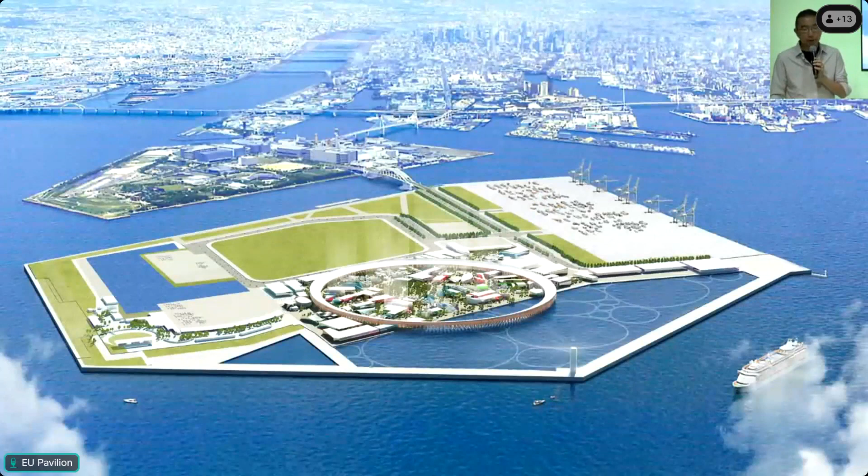But at the very beginning, I was thinking about what is the meaning of the Expo at this beginning of the 21st century. And of course, as you know, the Expo itself started in 1851 in London. It was like the promotion of this revolution of industry, and many new things came out. Then, of course, the beginning of the 20th century is more like modernization, modernism, and Bauhaus, and then a lot of new things came out. And 1970, that was one of the peaks of the Expo, I believe, that we had an Expo in Osaka, and it was a huge success.

But now, this is the 21st century, and a lot of new technology is invisible in a sense, and a lot of those kinds of things have been developed and made up promotions independently, company by company. So I was wondering, what is the reason? What is the important fundamental meaning of the Expo? And then that was the time, as you know, the beginning of 2020, April, that was the time of the pandemic.

We are in the middle of some uncertainties. And at the same time, around that period, everybody was talking about division in the world. Of course, we were talking about diversity, respecting the diversity, but if diversity ends up as division and conflicts, that was so pitiful, I thought. That was the global situation at that time, and now it's still like that.

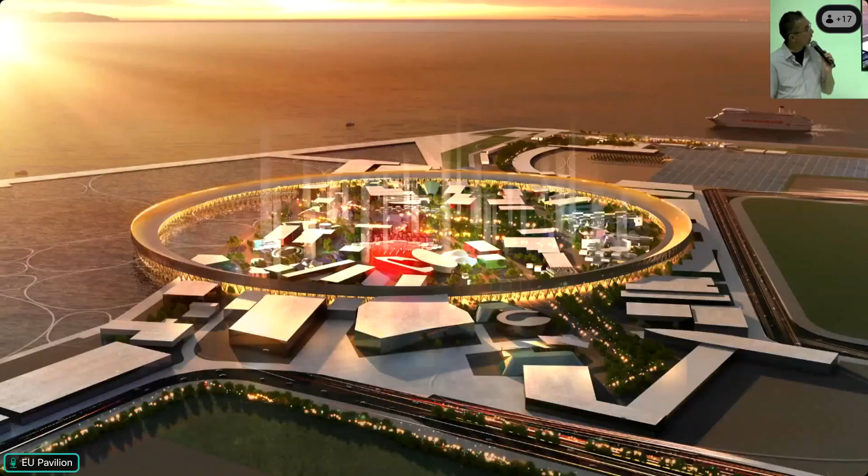Together to have real communication. Over COVID, we have more and more precious real communication—to see persons in reality and to see the situation, share the space in reality. So that kind of precious opportunity to show, to make a message that diversity could have unity together. That was the thing I thought at the very beginning of the process.

So it is not about the design, not about the shapes, but it's a very basic concept. Sorry, it is in Japanese, but it says diversity and unity.

And then diversity, but at the same time, it has something unified. And the world is sharing one important thing. So that was the very, very starting point.

And then I thought—of course we discussed the functional things, how to make a main circulation path, and how to protect people from the sunshine and the rain, creating the roof for those functions—but how can we create such a strong message to the world that this is the place? The expo must be, from now, the place where diversity and unity are strongly integrated.

And then I thought the simplest shape, this circle, should be there. Of course, before that, functionally, the circulation paths must make a nice flow of people, avoiding too crowded a situation. Even today, so many people, so it's crowded, but still we have the flow of the people.

So that functional thinking was there, but beyond that, this circle shape should be a very strong message that now so many countries, so many people are here in this place, connected to each other, making communications. So this pure shape could be the symbol of unity, and of course also the symbol of the circulation of sustainability.

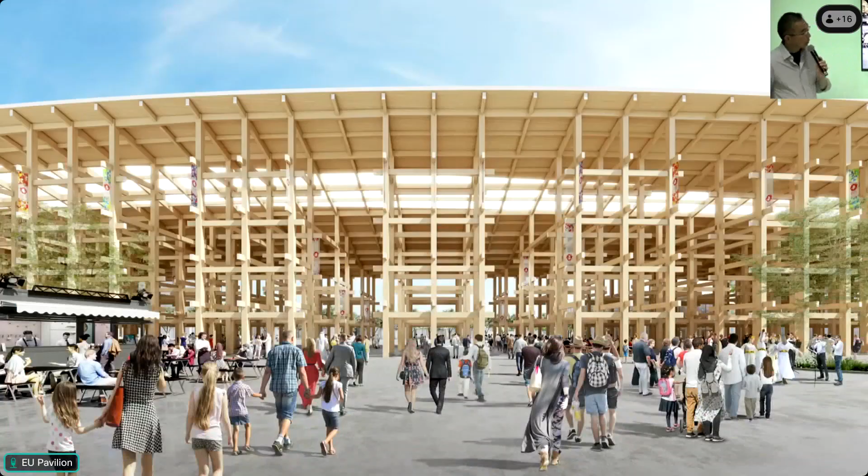Then I proposed to make this Grand Ring in a wooden construction. This is a rather easy decision. The decision itself was of course easy, but the realization was very tough.

In the last more than 10 years, large-scale wooden construction has really been developed and pushed, not only in Europe but throughout the whole world. I have had an office in Paris for around 10 years, and I really felt that there. I myself was also involved in a skyscraper made of wood—those kinds of projects are popping out a lot.

And in Japan, on the other hand, we have such a long history, traditions of beautiful wooden architecture, more than 1,000 years of history. So it is really wonderful to combine such wonderful traditions together with the latest technology to create our future architectural proposal. That was the reason why I proposed wooden construction.

And especially these joints—it's based on Japanese traditional wooden construction. But for example, in Kyoto, you will see Kiyomizu Temple and the famous stage, and the whole structure under that is made by something like this: columns, and then the beam sticking in, and then putting the plugs to fix it. Traditionally, they used wooden plugs.

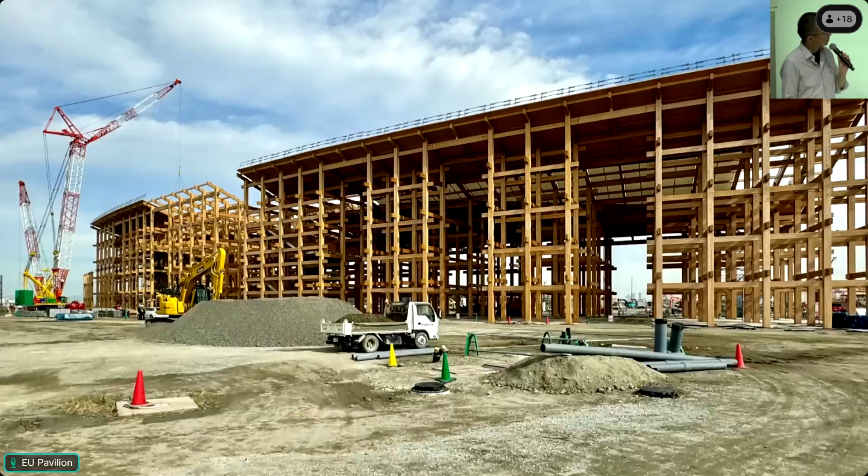We had three wonderful Japanese leading contractors, and they started to make a mock-up, then destroyed them to do experimental testing to see what kind of conditions they'd face. After many rounds of testing, they developed a new way, but based on traditional architecture. It took many years of construction, and a lot of criticism about the money, the uses, and all kinds of things. But finally, it's done.

One more thing is, this roof is not only a roof, but we planned it as a roof garden or roof pathway, because on this island - Yumeshima Island, a man-made island - if you're standing on the ground, you don't see the sea. Even though there's nothing built, you still don't see the sea, because there's a wall all around the island to block the big waves and to contain the filled land.

That was a fact that really shocked me. I came here at the very early stage of the project - there was nothing, flat land, but we didn't see the sea. That was a pity. So I thought it was important to bring people up to a higher level so they can look down on the whole pavilions, as well as look out to the sea, the Setouchi Sea, the Osaka downtown, or the Rokko Mountains - those beautiful surroundings. That's why we made a rooftop garden. And finally, it works very well.

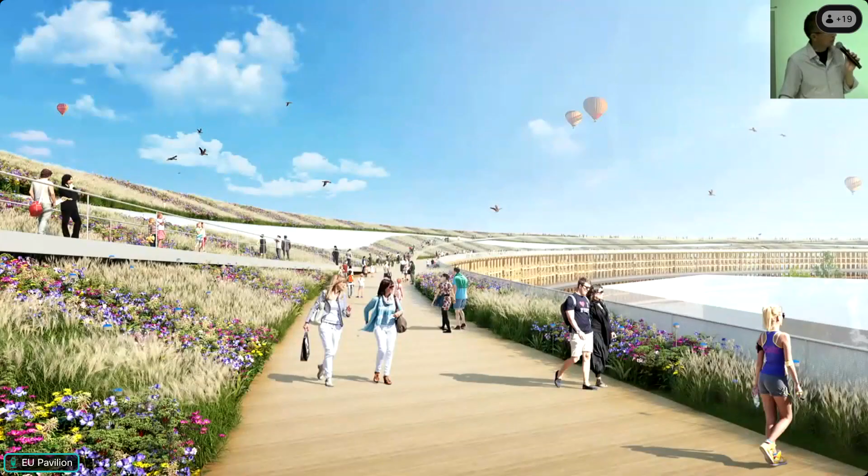This was the rendering showing how the rooftop garden of the ring would be. And as you see in reality too, we planted green flower gardens, with the lower deck and some slopes going up to the upper deck. But you'll see the entire edge of the ring cutting out the beautiful sky. Especially when you go up there and look down at the whole expo site, you'll see the entire circle as a pure circle, with all the pavilions within it.

So it's like you're in front of a small earth, and you'll also see the beautiful sky above it. That is the moment you feel, in this tiny place, so many different cultures and peoples are together, looking up at the same sky. That was our concept - diversity and unity - and here we have the real experience to feel that concept.

And now we have many photos because finally it's realized. I was so impressed that the reality - real structures and real experience - is so precious, much different from what you see in a photo or other representations. Whatever technology exists, real experience - seeing something with your own eyes in front of you - must be the most precious thing. And when you feel it together with many other people, that must be the most precious thing.

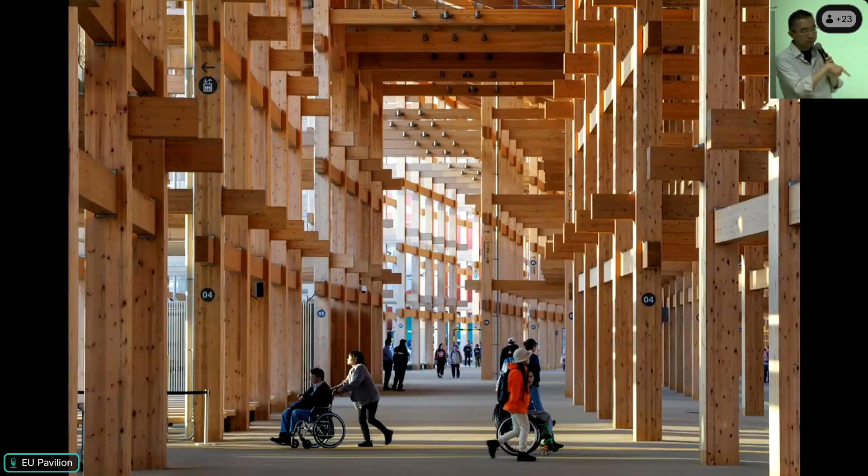And then openness, this is also very important. This circle shape, in a sense, is too pure, too independent. If designed in a bad way, it becomes too strong, independent, anti-human, excluding everything like a wall. But we tried to design it really open, human, sometimes irregular, so that if you get closer, you feel it's nicely, positively blurring and open, like a light structure. But if you zoom out, you easily see the strong message made by this pure circle. So here there's a contradictory coexistence of the strong shape of the circle and the open feeling of the boundaries.

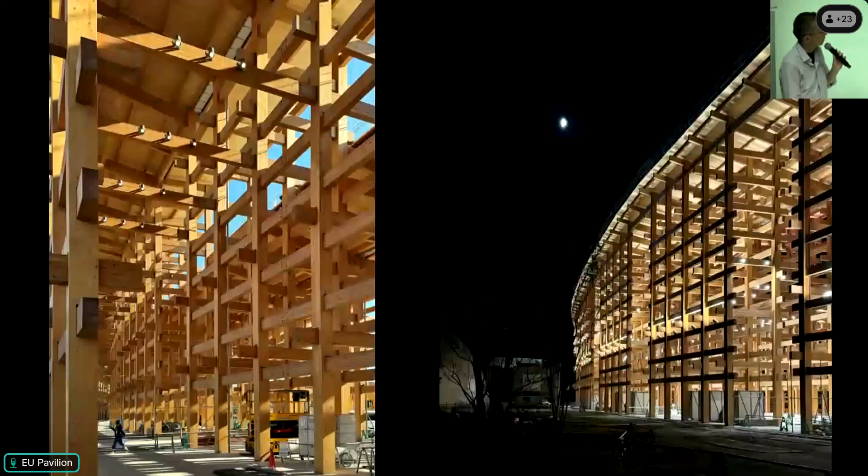The lighting is also very beautiful, especially with the wooden materials—really, really nice. There's artificial lighting and natural lighting. Since this is a circle, the sun goes all around it, so every moment the impression is different.

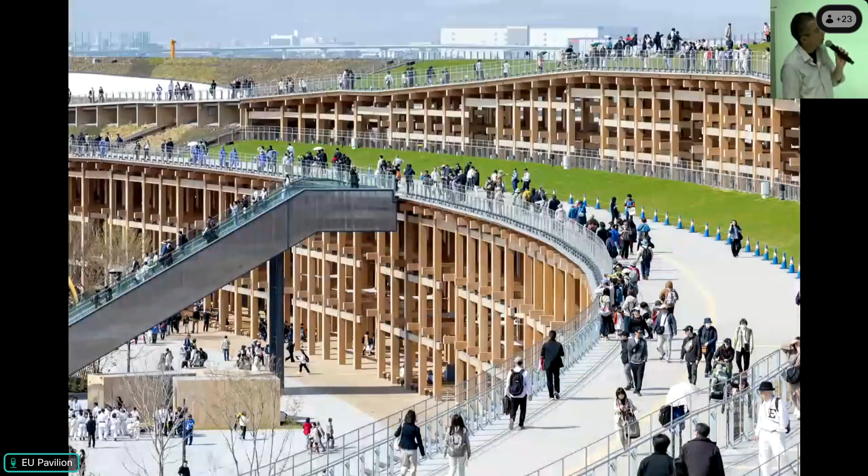And then we have this beautiful roof garden. This was right after the opening, but now this area is open to the public too. So even amid this huge scale construction and the crowded expo situation, you can just lie on the grass and rest, or sleep, on the tallest part of the ring.

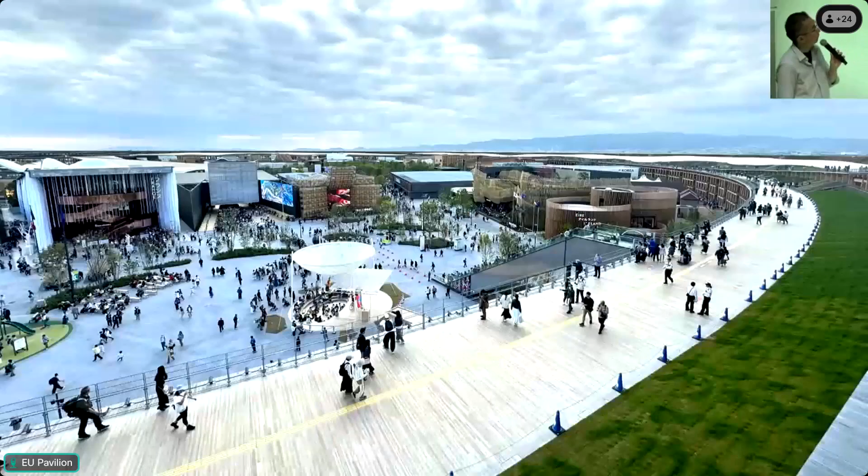From the highest point, you see the entire ring as a pure circle, and all the different pavilions representing the diversity of the world are there, in an organic way—some popping up, some in different shapes, but everything peacefully living together under the beautiful sky.

This year, Expo 2025, I think in retrospect will be defined as the changing point of construction from steel to wood. The first Expo in London in 1851 featured the Crystal Palace, made of steel and large-scale glass—that was a moment showing the future. The 20th century was the century of steel and glass. Throughout that century we developed many architectural styles and great things, but the major materials were steel, concrete, and glass. Now I feel that dominant architectural element is changing into something new, and natural materials are the key.

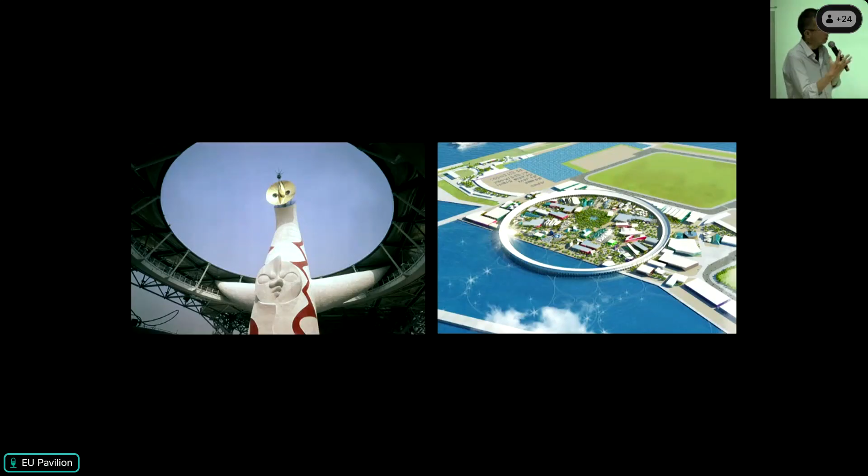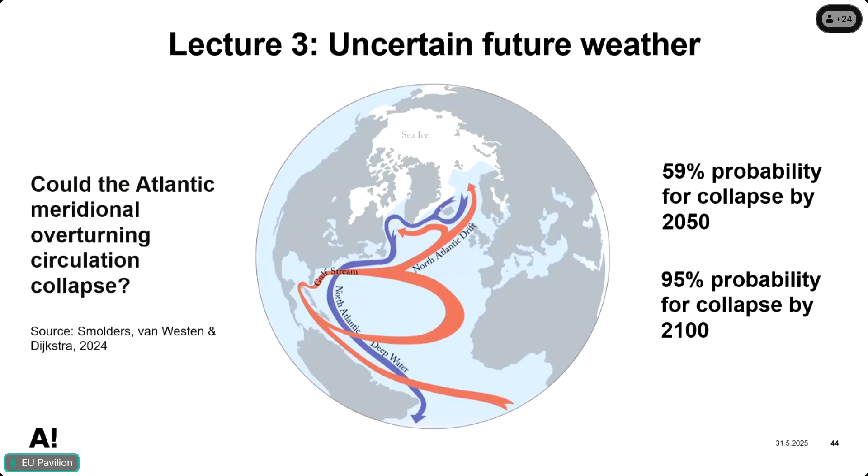It's very interesting. So we have very cold areas with so many snows, and also very hot areas, almost tropical weather. And we have mountains, which Matti-san likes so much, and we have very long sea lines.

In the 20th century, technology tried to cover the gap of climate, or gap of the region. But we have only one building act to cover every area from north to south, from mountain to sea line. In this 21st century, it is a little difficult to cover by the power of technology alone.

If we have each building act for each region, it could create an original scenery or landscape, and that could be a very attractive point for tourists, or it could be the motivation to have several housing types all around these areas. So the climate should change the design or design code of the area.

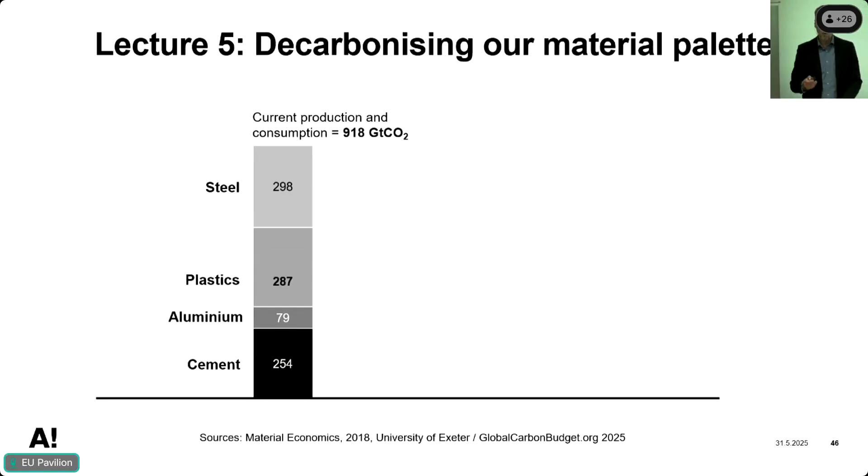Here are the emissions from the production of cement, aluminum, plastic, and steel by 2050 in conventional methods, going up over 900 gigatons. Of course that doesn't mean much, but if we draw the line of total global carbon budget for 1.5 degree warming, which is less than 230 gigatons, we can see that the emissions from these 4 basic materials is almost 4 times as much as the entire global budget.

And this budget here is not just for construction materials, it's for everything. Luckily, our industries are doing their work, learning new ways and getting finance for new products, utilizing energy efficiency in production and cleaner, more decarbonized energy. But with the help of these, we can get down, but not sufficiently. There is still too much emissions.

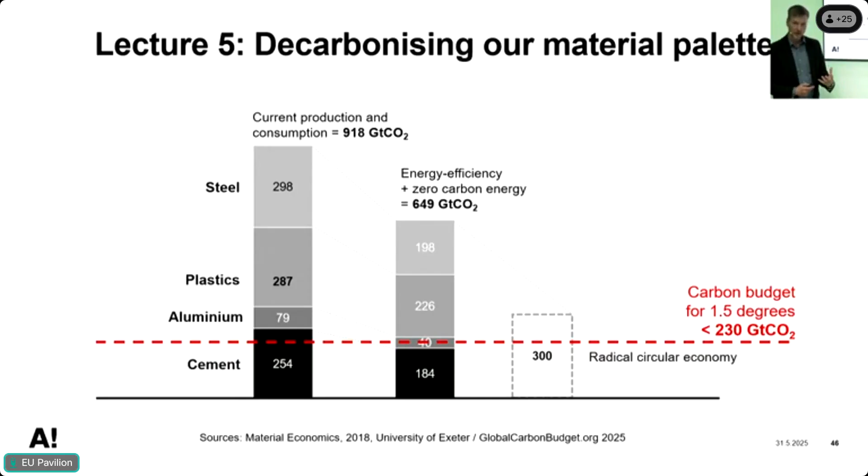Scientists have suggested that with very strong and radical measures of circular economy, the emissions from these 4 basic materials mostly used in construction could be pushed to 300 gigatons. But as we can see, unfortunately that's still too much. This is only one of the reasons why it unfortunately looks like the 1.5 degree goal is no longer realistic, or at least we are going to overshoot for quite some time.

The next line of defense is here, the total carbon budget for 2 degrees of global warming, that's slightly over 1,000 gigatons. But why this is so important for those thinking of the built environment is that whatever remains between this and the 2 degree carbon budget is all that's left for all other human needs.

That's why I think the concept and ideas behind the new European Bauhaus are so important, because those in charge of making decisions for the built environment, or designing or building the houses, can do so much good and leave more of the budget for other important human needs. There is a great opportunity to be doing really something good in the construction sector if we can do it with minimal use of resources. So that would be my lecture.

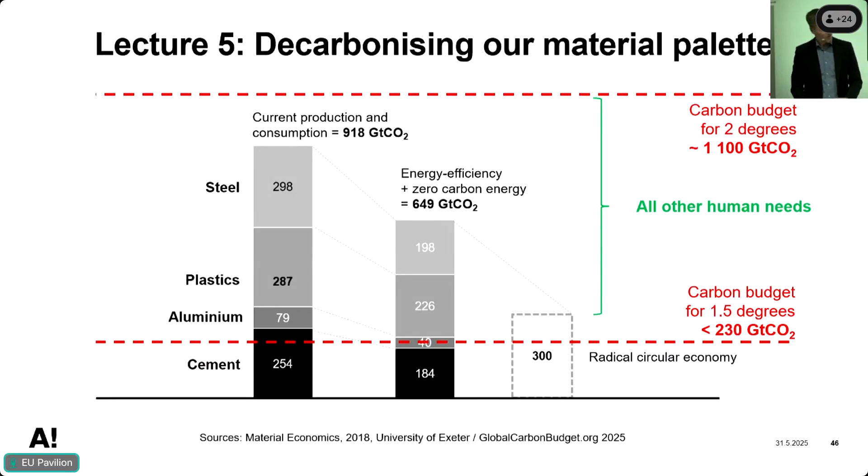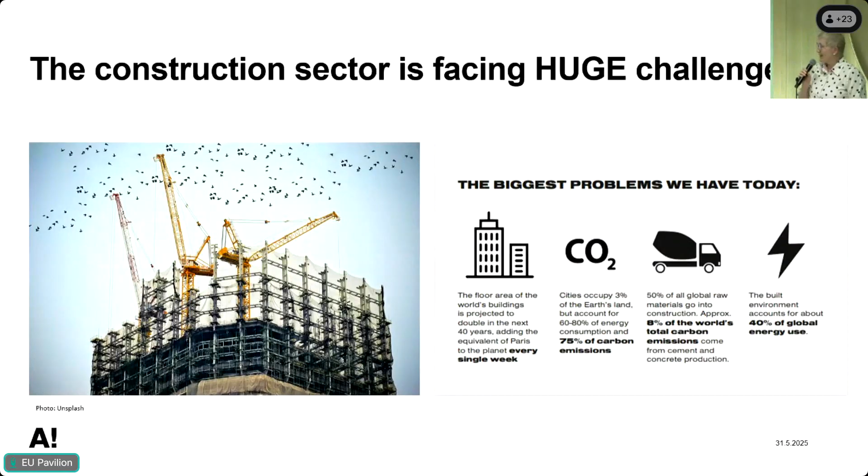But maybe one of the issues is that when it comes to new solutions, we are often quite short-term aligned. Basically, we're replacing harmful processes and materials with just less harmful practices. These less-bad options are really not enough. Even though we are learning to reduce, reuse, repurpose and recycle, we still need more.

We need radically new ways to actively contribute back to the ecosystem—restoring, renewing, regenerative measures, as we've also heard in yesterday's and today's sessions. A major shift in how we operate is needed. And the question is, how can we actually make this major shift?

Because we're talking about structural and systemic issues—transitioning from an unsustainable way of life to a sustainable one. This means we should influence a complex set of interconnected powers, which are often very ambiguous and contradictory, and we don't have that many tools to address these issues. So we need the tools.

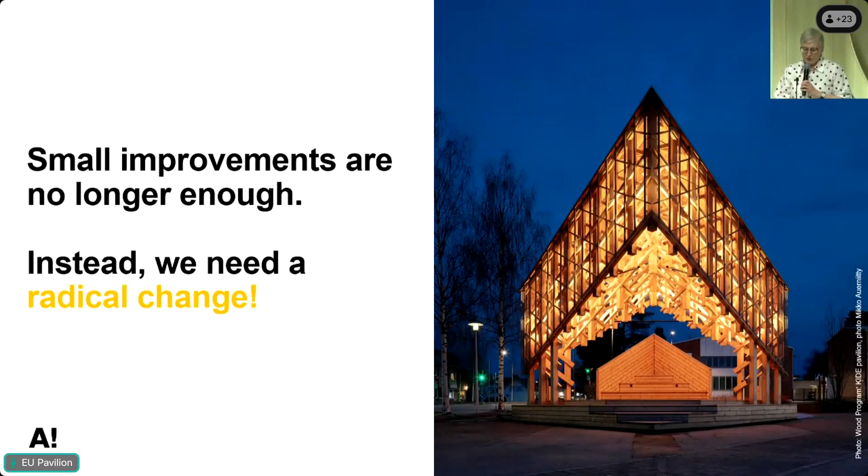Society is very accustomed to looking to the natural sciences and engineering for solutions. But we should recognize that although these disciplines are very good at optimizing and driving operational processes and innovating, they are not very good when it comes to paradigm shift and our mindsets. So when we want to change the mindsets and values of people, we should be looking at completely new disciplines, such as the creative fields.

And it's very important to understand that we're all in this together. Even though there are lots of professional designers and architects in the room, who are the ones making concrete decisions about these things, we're all very much responsible, because it's about our homes, how we want to live, how we choose to live, and what values we want to cherish.

So we need action, and the first step might be to start envisioning an inspiring future within the planetary boundaries. What could our buildings and environments look like if we truly respected our planetary boundaries? We have a couple of examples from our Aalto University researchers of how they have started envisioning an inspiring future. So we're going to see two short video clips, and after that you can start imagining your own future within the built environment. First we'll visit Professor Matti's tiny home.

It's a tiny house which minimizes environmental impact and maximizes efficiency throughout its life cycle, and every little detail is thought through in Matti's home, from raw material choices, space utilization, to lifespan issues. So let's have a look and see where Matti lives.

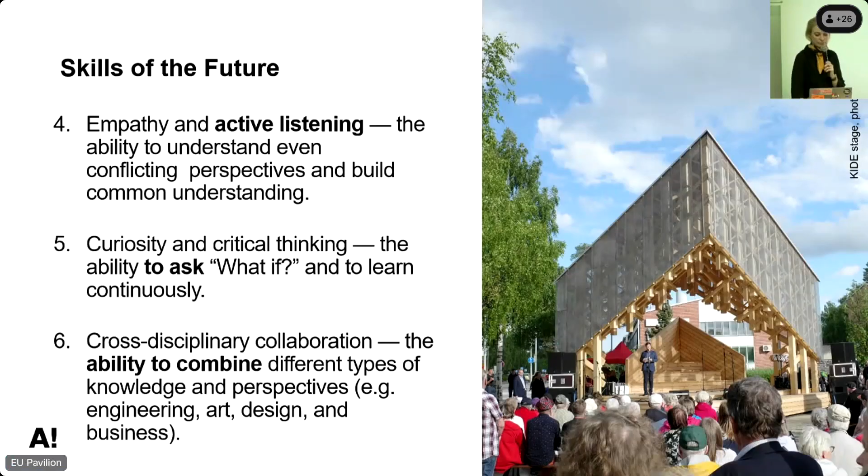And our colleague Jaakko is probably expecting some unexpected situations in the photo. Yeah, that's true. 4, active listening, the ability to build common understanding. 5, curiosity and critical thinking, the ability to ask what if. 6, cross-disciplinary collaboration, the ability to combine different types of persons, knowledge and perspective. And the last two: vision and futures thinking, to imagine futures, which is what you've been doing the whole day.

And designing within planetary boundaries and learning principles of circular economy. So these are the skills we have pre-listed for you, and we know you have many other thoughts or skills that we would need to learn in the future. So we are really interested in hearing from your point of view what skill is missing from this list.

So, next, it's time to vote. On this table, we have 3 similar posters. We want you to take 3 stickers and vote for 3 of your favorite skills that you think are most important to make your vision come true, and place the stickers on the poster. And if you have an idea of a skill that's missing, write it on a post-it note and leave it on a poster. That's all we are asking from you, so go and vote.

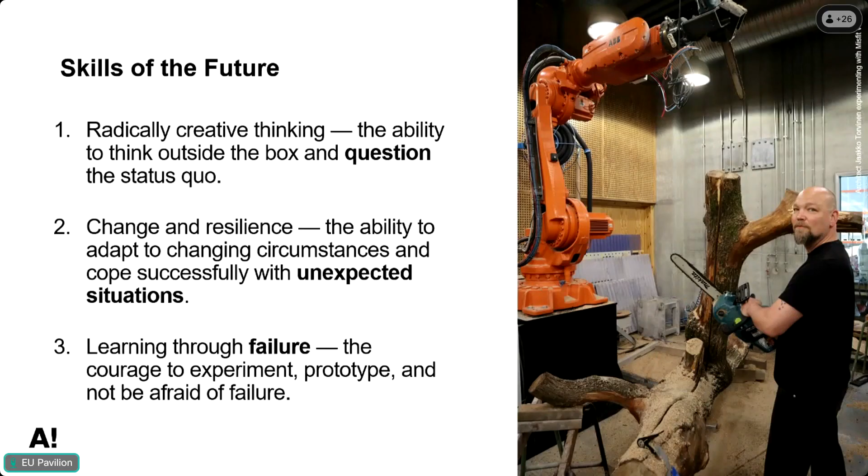And just to recap, I will put the skills on the presentation here so you can see them as well, and so our online participants can see them too.

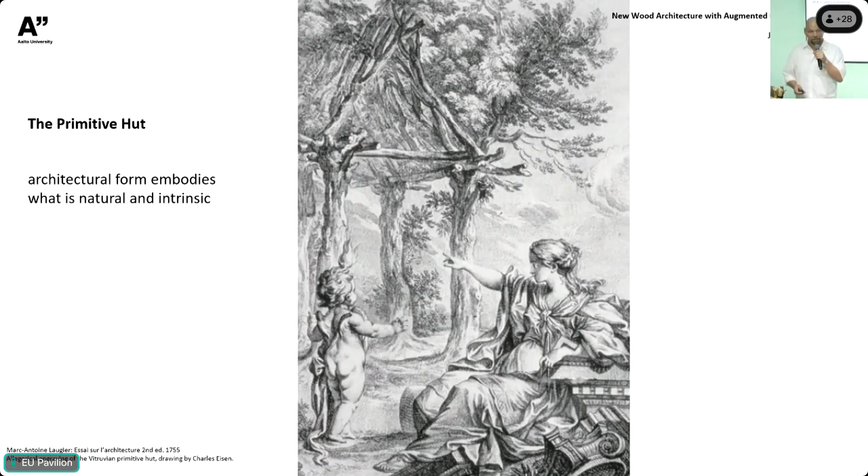So, where my inspiration comes from — I think we as designers, and everybody, should look to the history where we were building and designing more with nature, not forcing the material to be something that we want, but taking it as it is and using it cleverly. For example, Sami people in Finland used curvy wood parts to create these arches for the kota structures.

Or in northern India, where live roots are used for bridges. Back in Scandinavia or the Nordics, we used to use L-shaped wooden parts to create cantilevers, for example for a balcony or for a water gutter.

Or instead of trying to use different shapes, using some irregular wood parts instead of straight pieces, like in this Danish example. Or a similar idea in West Africa, in Benin, where load-bearing columns are also these curvy wood parts. And vernacular architecture from West Africa, where these Y-shaped tree parts are used as columns.

What is truly fascinating for me is this naval architecture from the time when ships were still made from wood. People were looking for certain types of tree parts to use in different places in the ship. So instead of trying to form something from the wood, they were actually searching for certain parts, or later on they started growing them in certain shapes for the inventory of the future.

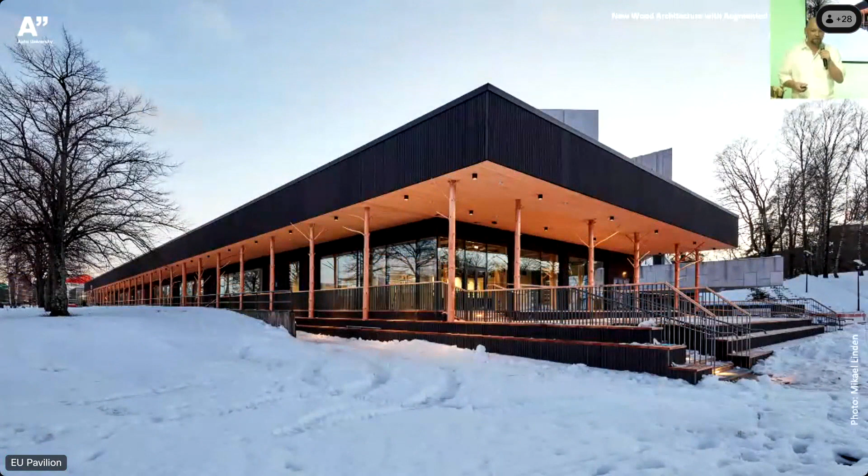All this inspires me in my designs, and this building is called Little Finlandia. It was designed to replace Alvar Aalto's Finlandia Hall during its renovation, and it uses natural trees with branches still intact as load-bearing structure. The idea was to bring a forest to the city. As I remember, the place before this time when I was designing it, there was actually a small forest, so I thought it would be fun to bring it back.

But also just to be resource efficient, not to cut down too much timber from the forest, but use it as it is. This building is actually designed for disassembly, and next year it will be disassembled and moved to the next place to serve as a school.

I was choosing with my colleagues all the trees from the forest, and as Matti said, I'm used to walking in a snowy forest, like in Lapland. The snow might be up to here while I'm walking there. Luckily this time it was only to this, and we chose 110 trees to be felled down. The snow was actually a good thing, not for walking in the forest, but for felling the trees to avoid the branches breaking, as I wanted them to be intact and create this forest-like atmosphere.

In a contemporary way of using wood in architecture and construction, normally we would have used glulam. But if you think about resource efficiency, now we are using almost 100% of the felled wood when we use these logs. We only debarked them with a high-pressure washer. But with glulam or even sawn timber, we would need double or triple the amount of resource, because when cutting it we lose material, and planing, we always lose material. That was something I was thinking about while designing this building, but mainly it was because I just love how the wood as it is looks.

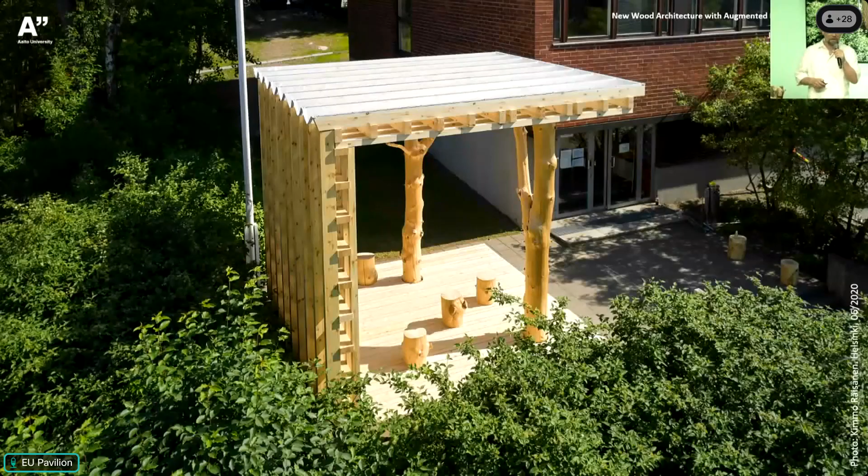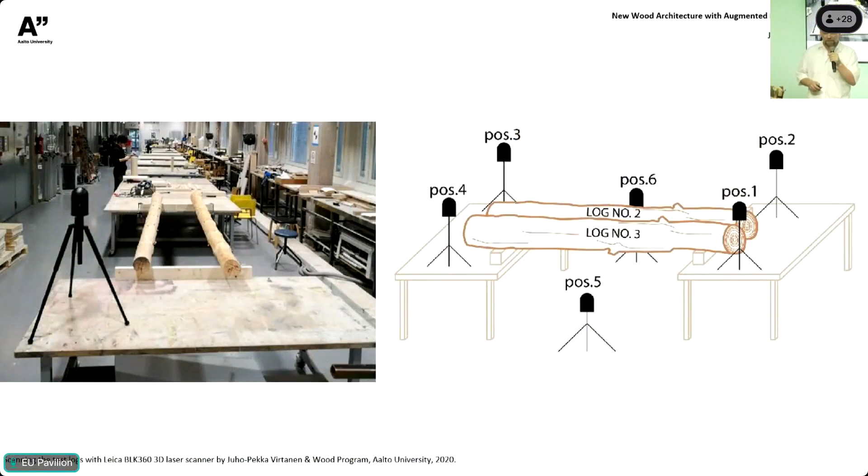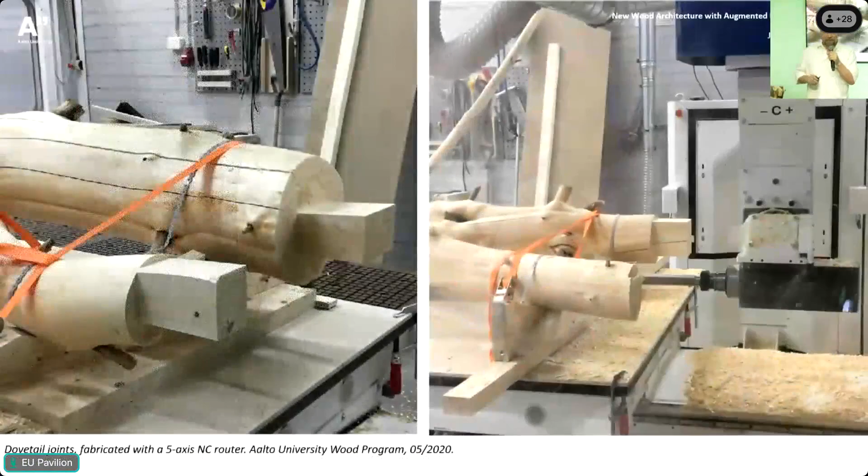We went to the forest, took the trees, and debarked them with a high-pressure washer, and also did some 3D scanning. This was the first time I was introduced to how to make a digital copy of something with organic shapes. It was super fascinating to actually get a 3D model of a real element which has grown, and we thought it was necessary to know that to make these structural connections.

In this case, we 3D modeled the dovetail joints that were then carved with a CNC machine. In Little Finlandia, with 95 trees, it was done in a little more simplified manner, but anyway, this was the starting point.

Then, for another project, I came up with an idea of bundling some curvy wood parts, inspired by historical ways of bundling weaker elements together to create columns. In this case, I designed to cut two sides of the trunks into a wavy surface so they could be connected together.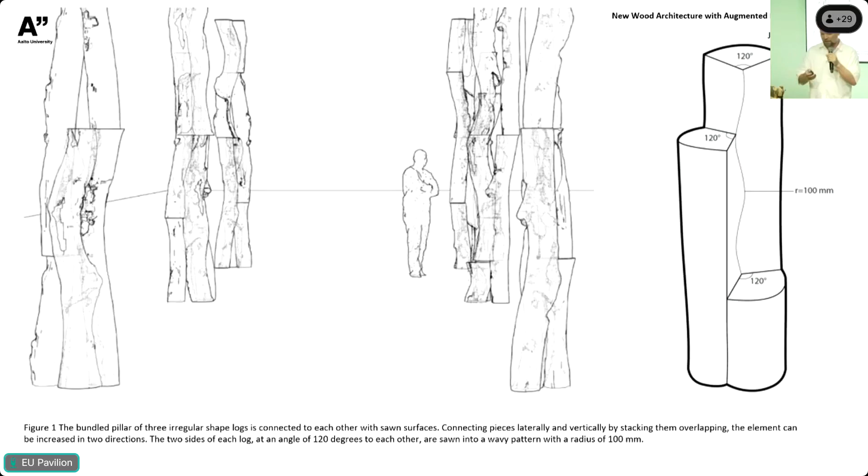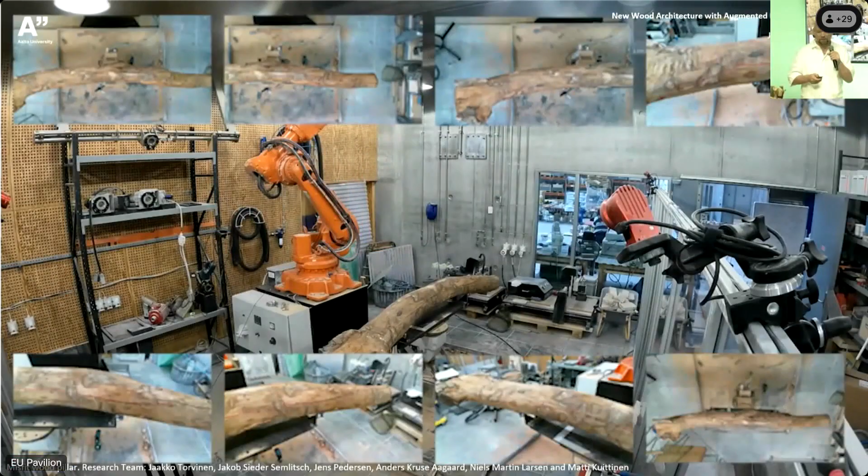I was lucky to have a 6-axis robot working for me, so I asked it to 3D scan it first. That solved some of the issues we always have when working with natural material - knowing where the actual workpiece is compared to the machine. When you scan it with the same machine you're then operating, it's quite a smooth operation. If I cut it myself 3 times, the shapes would always be a little different, but when the machine does it, the pattern is always repeated the same, so it can be connected to any other piece, no matter what it was originally.

So what I enjoy most is working with this misfit wood, as I call it, like this misfit oak. I salvaged this one from a sawmill's yard, since they didn't know what to do with it. They had cut it down, but they didn't know how to saw it or what to do with it. So I made a digital copy and again started designing what to do with it.

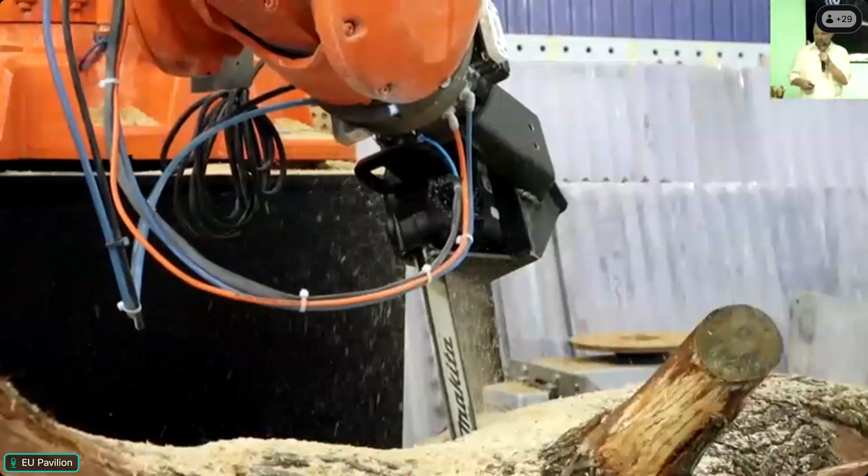This time, I taught a robot how to use the chainsaw. So instead of doing it by myself, the robot was doing my work. The idea was to cut it into four pieces and then turn it inside out to make a structure, like a self-standing structure, just made from one single oak trunk.

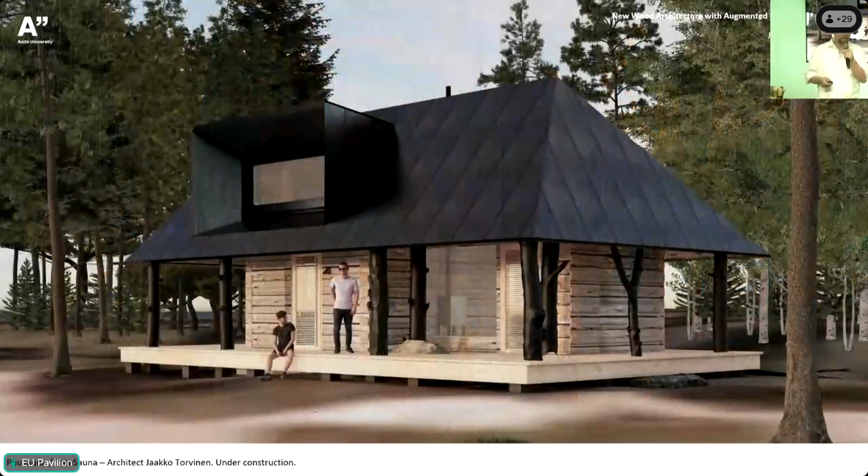This is inspired by old designs - at least in Britain, the cruck frame is pretty similar in 2D, but this was now in 3D. What is currently on my design desk, or actually under construction already, is a tree sauna or wooden sauna. Puu in Finnish means both wood and tree, so this is puusauna. It also uses natural tree trunks as the load-bearing structure for the roof. This time we are charring them, making them look like these black trees.

3D scanning in this project was a communication tool. The log constructor is around 3-4 hours drive from my place, so I didn't want to always go there. So I asked the log builder to 3D scan the manufacturing hall now and then, so I could take a virtual visit and see what they were doing. And it was super fast - nowadays you can 3D scan things with your phone, iPhone Pro, or some Android models, which I'm going to show you in just a few minutes.

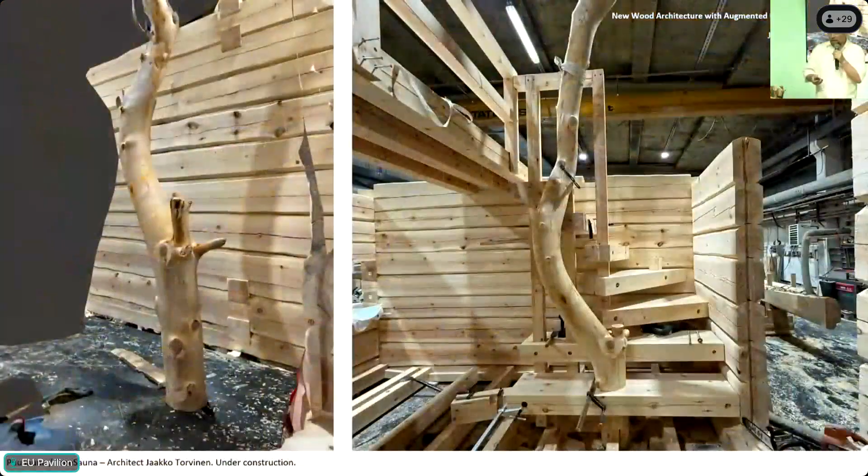So it was a communication tool, but it was also a design tool. I chose one of the trunks to be inside the sauna, part of the staircase, and I 3D scanned the trunk so I could design how it's actually fitting there.

And now I'm going to show you how this works. Hopefully it's going to work out well. So I opened an app that is called Scaniverse. It is freeware, and there you can see yourself.

So, for example, these small pieces of wood, I can start 3D scanning them. You can see always where the red and white stripe is, and it hasn't scanned that part yet. This technology uses LiDAR, the laser, but also the photo that is taken all the time. This will take half an hour, so probably I'm not going to use the whole time here - I'm going to stop it.

But as you can imagine, I have already 3D scanned this same piece and several other logs. Depending on how much time you use for 3D scanning, you get more details on it.